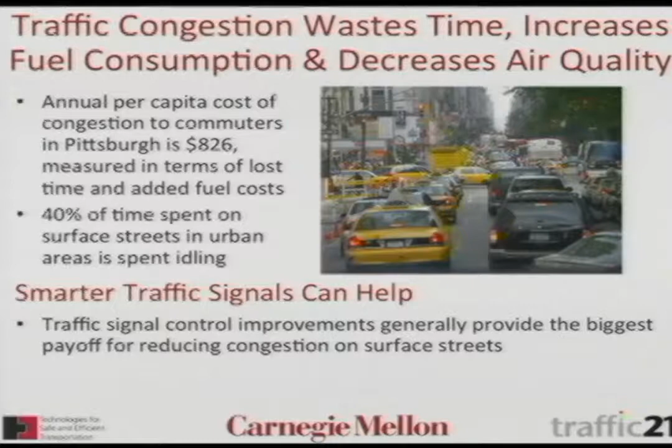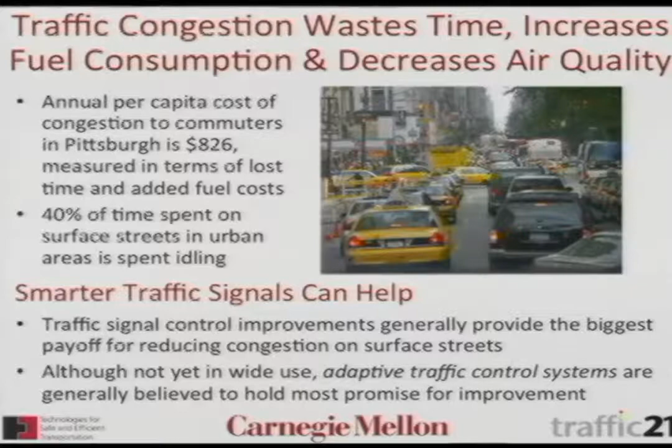The third way I could think about reducing traffic congestion is to increase or improve traffic flows, and that's really going to be the focus of this talk. The hypothesis that drives our work is that smarter traffic signals can help. It's generally recognized that the biggest bang for the buck you can get in improving congestion on surface streets is through better traffic signal control. And while they're not in wide use yet, adaptive traffic signal control systems, which I'll be focusing on today, are generally believed to hold the most promise for improvement.

Before talking about adaptive systems, let's get a basic sense of what we're after. Traffic signals are driven by signal timing plans. Here's the basic idea of how they work: I've got an intersection—east, west, north, and south. Typically, traffic signal plans are built by first looking at the different movements that can move through the intersection and grouping movements into phases. Phases would be movements that are mutually compatible, that can move at the same time. So you can see I've labeled some of the moves there—2-6, for example, is an east-west flow that can operate simultaneously, and that's encapsulated as a movement phase.

A signal timing plan is then just a sequence of movement phases. So determining a signal timing plan is really to establish a duration for each phase and what sequence—typically in conventional systems, the sequence repeats. In the example on the slide, we move through 4 phases, and then that cycle repeats. That's a classic example. So the signal timing plan problem is really to decide how much green time to give to each phase and in what order.

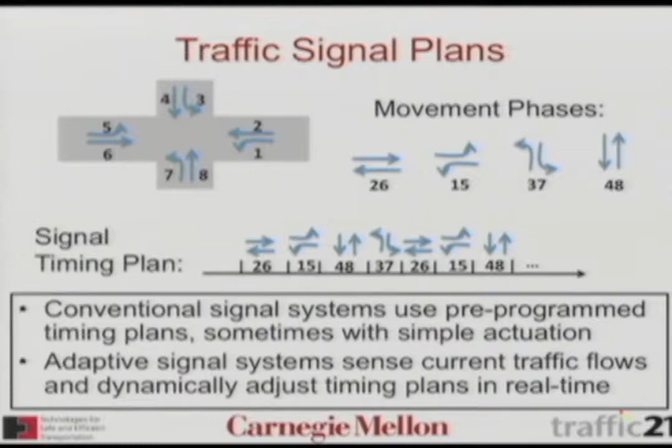Adaptive signal systems, on the other hand, really sense current traffic flows in real time and dynamically adjust the timing plans continuously. So based on the traffic patterns it sees in front of it, adjustments are made. That's the class of system we're focused on—that's what our work has been focused on, and that's what we're talking about.

Let's take a look at adaptive signal control systems that are out there in the world today. Adaptive signal control has been the subject of design for many years, and there are several systems that have been created and are out there.

The most success has been gained by centralized systems that take whatever detection is happening at the intersection, whatever view of oncoming traffic is coming, pull that back to a central location, do some amount of computation, and then push out changes to the timing plans that are driving the actual intersections.

As you think about that process, it can often be very successful, but it's often limiting with respect to reaction in real time. Typically these centralized systems operate on a time scale of adjusting the lights, integrating results from traffic patterns, maybe combining that with historical information about the flows, and then making adjustments on the order of minutes—every 5 minutes, every 10 minutes, etc.

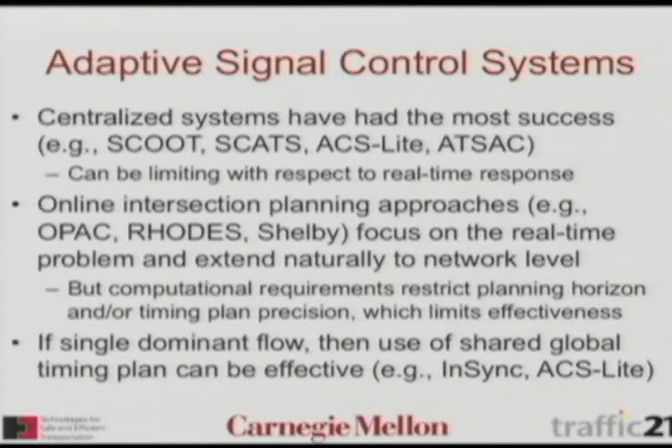One other class of systems: if I can make certain assumptions about what kind of flows are going to be in my traffic network, and in particular if I can assume there's a single dominant flow—say I'm in an arterial situation, there's a main road, and all I really need to do is manage traffic on the side streets—then I can take advantage of that structure of the problem and sometimes do very well by using a shared global plan to control the main artery and then operate locally to manage the side streets.

In fact, there are a couple of existing systems that take advantage of this kind of idea and can do very well in arterial settings. You see most of the success with current adaptive signal systems in arterial kind of settings.

One distinguishing aspect of our focus is that we're really aimed at urban road networks, networks that have more of a grid pattern, where there's more than one—there are multiple, typically competing dominant flows, and those flows change over time. So it's not possible to identify one single flow, and you need the system to discover that.

This is a slide I've been using for quite a while now. About 3 or 4 years ago, we started looking at this problem of real-time control of urban road networks, sort of the missing link in current technology. The goal of our work has really been real-time optimization of traffic flows for urban or grid road networks, characterized by the fact that you have multiple competing flows. You have to continually identify the major flows and go from there.

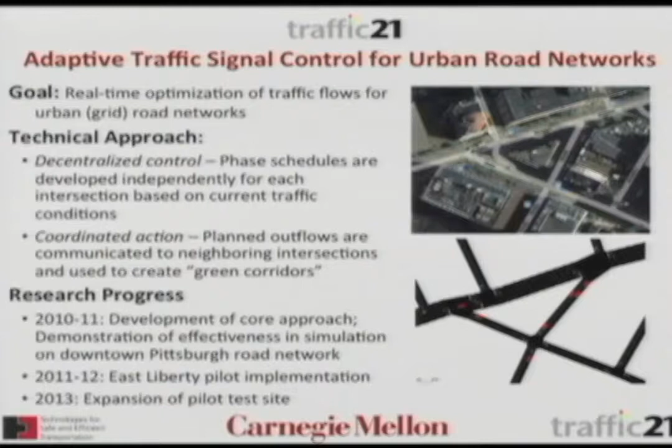That led us to look for an opportunity to try it out in practice. In the last year and a half, 2011 and 2012, we've been developing a pilot implementation of the approach and deploying it in East Liberty. It's been running there since last June, and our current focus is expanding the pilot test site in various ways.

Let me give you a sense of the technical detail, the principles underlying the approach, and then we'll move on to the deployment. The name of the system we've built is SURTRAC, Scalable Urban Traffic Control. We'll see what that means as we go along.

So here's the basic concept of operation. There's detection at each intersection. In our case we've been using cameras, but the system is watching ongoing traffic flows.

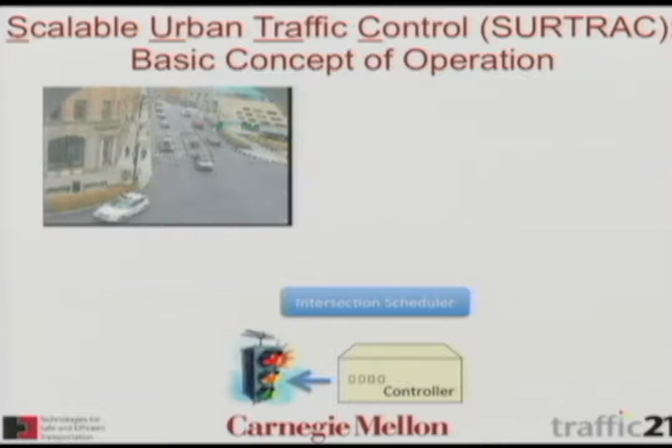Those flows are extracted, so we extract the current traffic patterns from the sensor data streams. We're using cameras, but you could use other kinds of detectors. Then our intersection scheduler computes a phase schedule, a timing plan that optimizes the flow. It essentially moves the traffic it sees in front of it through the intersection in a way that minimizes the cumulative delay. That's the objective we're currently using.

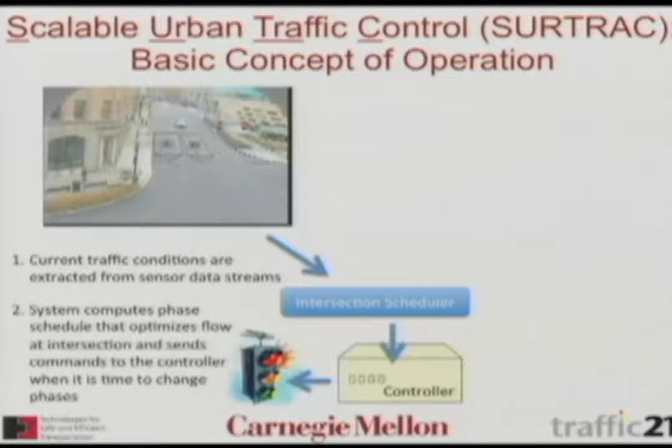Then, after it builds a schedule, it sends commands to the actual hardware controller driving the signal, telling it whether to stay in the same phase or move on to another phase.

It also communicates the outputs, the outflows it expects from its plan, to its neighboring intersections, which are doing the same thing, operating asynchronously. As they build a schedule, they now have information not only about what that intersection is seeing right in front of it with its detectors, but also about what's coming down the pike, giving it a longer horizon to plan against.

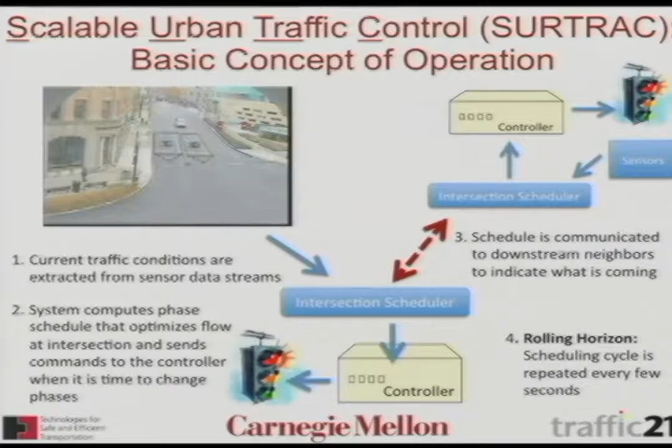That whole process repeats every couple of seconds. So it's a very real-time system, with the opportunity to adjust the timing plan on a second-by-second basis.

There are a couple of key technical ideas underlying this approach. One is our approach to intersection control, which we've formulated as a novel single machine scheduling problem, using an aggregate representation. I'll explain: we represent traffic flows essentially as sequences of queues and platoons, and those identify our input jobs from a machine scheduling point of view.

We then use the schedule to decide whether to extend or switch phases. That's one key idea. With respect to coordination between intersections, we communicate schedules to downstream neighbors to give them visibility of future input jobs.

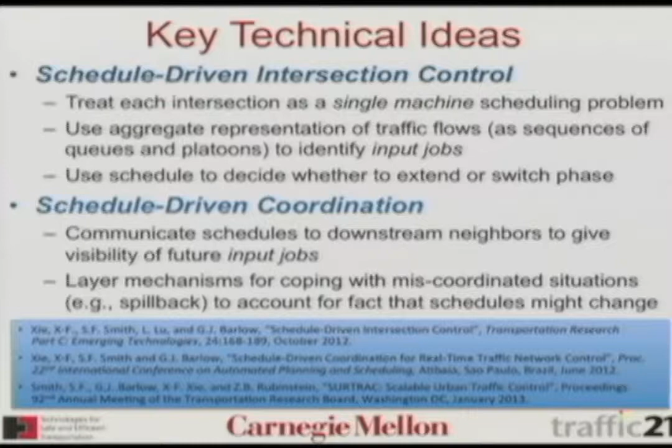This idea, if you think about it, is very simple, but it works perfectly, coordinating well if intersections execute their plans exactly as planned. Of course, that doesn't always happen, so we get situations where the plans get out of whack. Our approach is to layer on top of this basic communication protocol some mechanisms for coping with specific kinds of miscoordinated situations, to account for the fact that schedules might change. I'll say more about that in a few minutes.

First, let's look at the model of how we represent the problem, which is what allows us to get the computational efficiency. If you think of a flow, this is the kind of information I assume I'm getting from the detectors. My intersection is on the left corner here, and I've got a stream of vehicles approaching the intersection. Some are already in queue, waiting, since right now I'm at a red light.

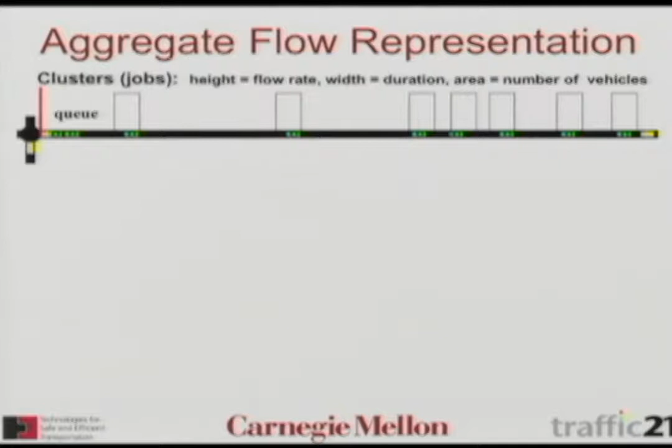So what we do is take that base level optimization and do a simple clustering. On one hand, we do what we call threshold-based clustering, which essentially puts together vehicles that are in close proximity to one another into larger entities, which we'll sometimes refer to as platoons.

So you can see there, given the proximity, we've got two vehicles that were floating that didn't get combined with anyone, so they just become their own cluster. A second form of clustering is what's referred to as an anticipated queue.

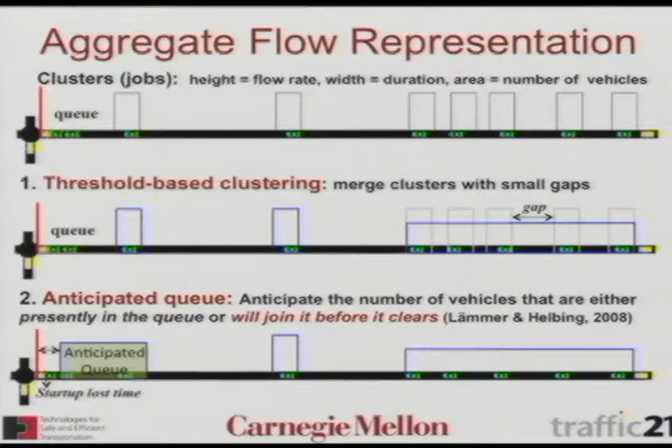Here we're just clustering the vehicles waiting at the intersection, and also those expected to join the queue before it can clear. When the light turns green, there'll be some startup lost time as cars get moving, and the vehicle approaching behind will be in the queue before it even gets close. The simple idea is to use these larger clusters as the units we'll build the timing plan around.

So with that in mind, the scheduling problem really looks like one of just sequencing clusters that operate on competing phases.

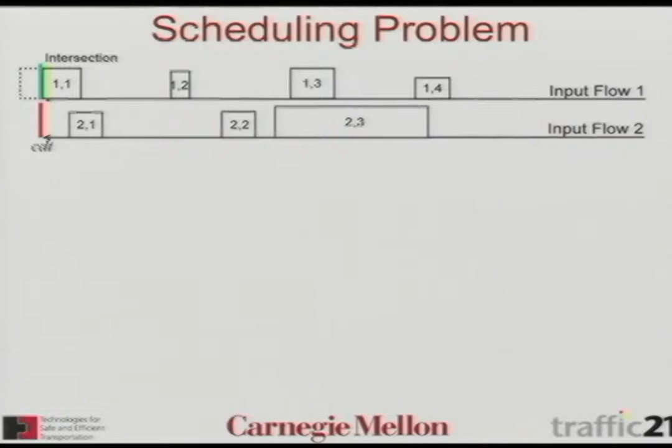Think of an intersection where you've got two one-way streets coming together—it's the simplest kind of approach you can get. I've got clusters coming toward the intersection in both directions; one light is green and one is red. The scheduling problem is just to build a sequence that gets all those clusters through the intersection.

So a schedule is a sequence of clusters. We assume, at least for now, non-preemption, so the jobs are indivisible—you've got to switch on a boundary.

Here's an example of a schedule. You can see that in putting them into a single sequence, it was necessary to delay movement on some—everything's not moving perfectly there. That's due to constraints, such as it taking a certain amount of time to shift from one phase to another. There's a yellow, and in Pittsburgh there's an all-red phase, which we've just collectively called yellow here.

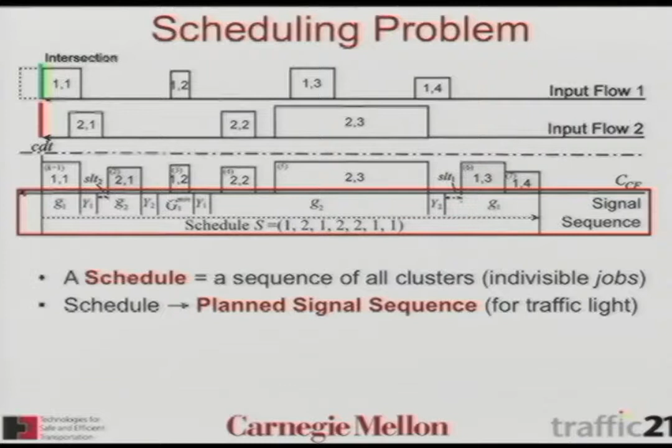Once I have a schedule, that implies I have a signal sequence that I can turn into a timing plan. There's still flexibility for deciding the plan, because there are many places along those switchover points where I could actually terminate the phase, but I've got that phase.

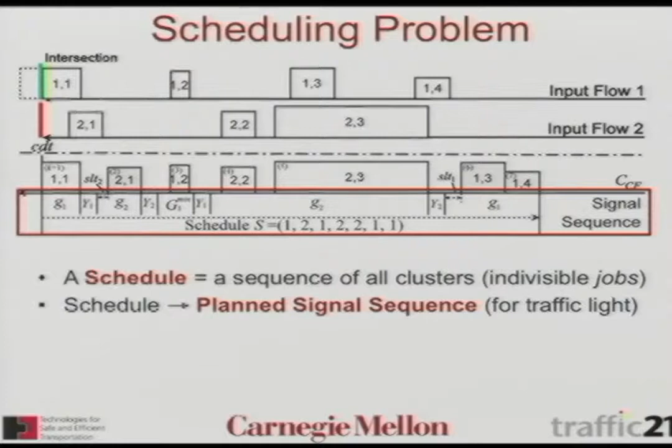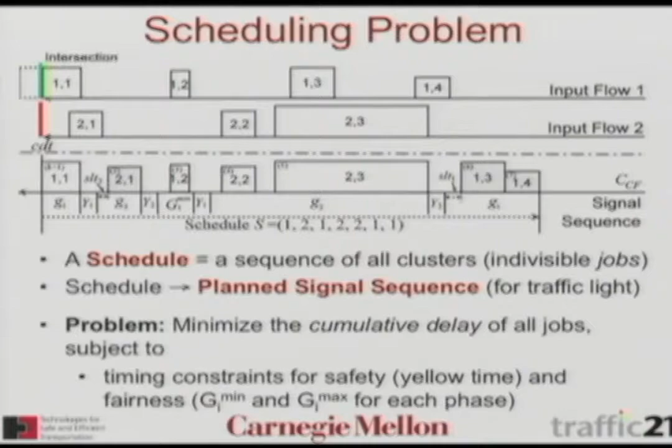The problem we solve for the intersection is to minimize the cumulative delay of all those jobs, subject to timing constraints for safety, which correspond to the yellow and all-red time, and fairness constraints, which amount to minimum and maximum times on each phase—so you give everybody a certain amount of time to shoot through, and there's a maximum.

So we solved this problem doing a forward dynamic programming search, where we simply add a new job at each decision phase. We can take advantage of pretty powerful pruning conditions to eliminate dominated solutions at each stage, since we have a regular objective function. So if I get to a certain depth in the tree and I'm at the same current phase, with the same clusters on the timeline just in a different order, I can always take the one that minimizes delay with confidence that it'll dominate.

It does dominate. We do one thing in cases where we are greedy, in that we will only preserve the state with minimum delay at each extension—that just gives us speed.

What we've done—I didn't show you the classical formulation of the problem—is turned a problem whose complexity is typically exponential in terms of a planning horizon, which limits how far you can look ahead or limits the precision of that lookahead, into a problem whose complexity depends on the number of phases and the number of clusters, much smaller numbers. If you think about the horizon we're likely to be solving for, it's a very manageable computation.

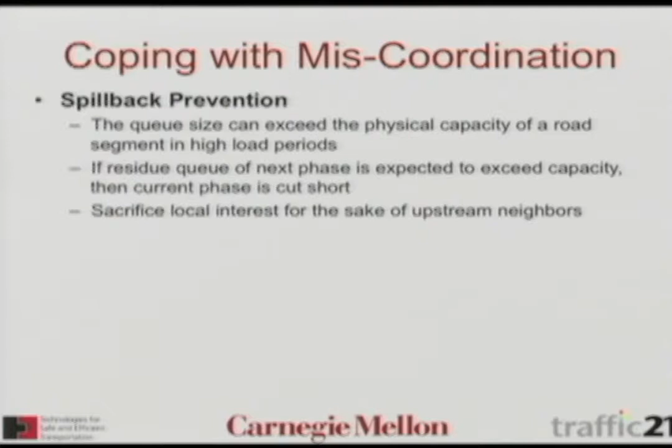Another coordination protocol we've introduced recently is what I've called network-driven actuated control. Here's the issue: the larger I can make the maximum times for a phase, the greater flexibility I give to the adaptive system, and that gives me the opportunity to do more optimization of overall traffic flows. However, the longer I make those maximum times, the more likely it is that any traffic on minor cross streets is going to suffer. So that's the trade-off, or the dilemma, we'd like to pay attention to.

Rather than just take the optimized solution the system gives, if we can find some opportunity through coordination to do better, we will. The basic idea is that intersections communicate another piece of information to their neighbors - basically phase change information. Whenever an intersection changes phase, it communicates to its neighbors that it has changed and when it expects to move on to another phase. With that information, you can do such things.

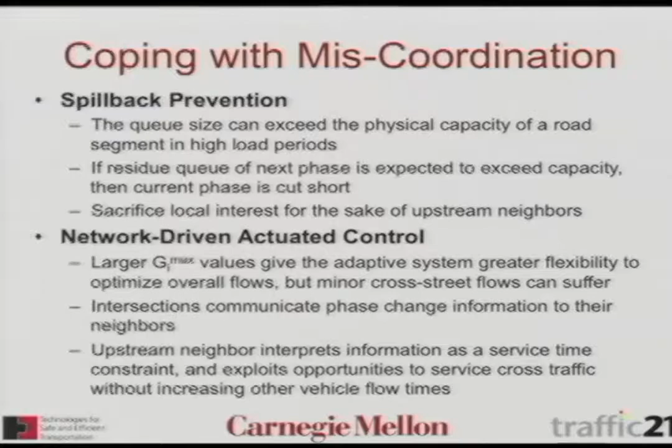Upstream neighbors can interpret that information as some kind of service time constraint. So as long as it can do it - let's say the downstream intersection is in a cross flow, and the upstream intersection is green. If I've got side street traffic, and I'm green because I hardly ever see side street traffic, but if somebody is waiting - a vehicle or a pedestrian - and I can service that cross street and get back into the flow before the downstream intersection switches phases, then I haven't delayed any vehicles, but I've serviced that cross street. This is a newer optimization we've just put into the system.

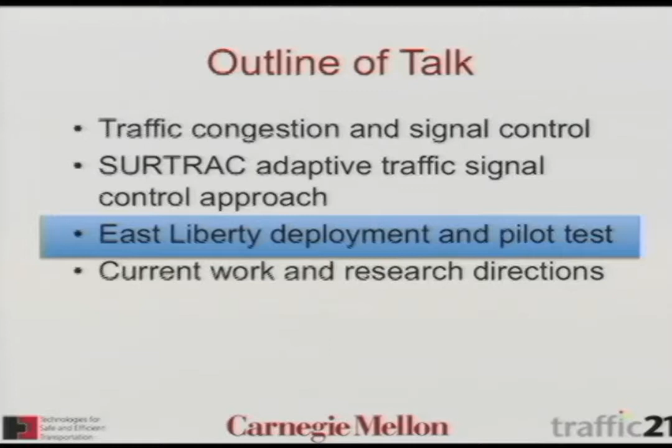So, as I said, we originally got good results in simulation, so we started looking for an opportunity and talking with the city of Pittsburgh about where we might try this out and see how it works in practice. We settled on a nine-intersection grid in East Liberty, just a couple miles from here.

I'm going to try to get out of this for a minute and see if I can show you - see if I can find this. Essentially, I'm borrowing a video that they allowed me to use, made as part of a concept proposal for a project to relocate the East Liberty busway. This is just a portion of it.

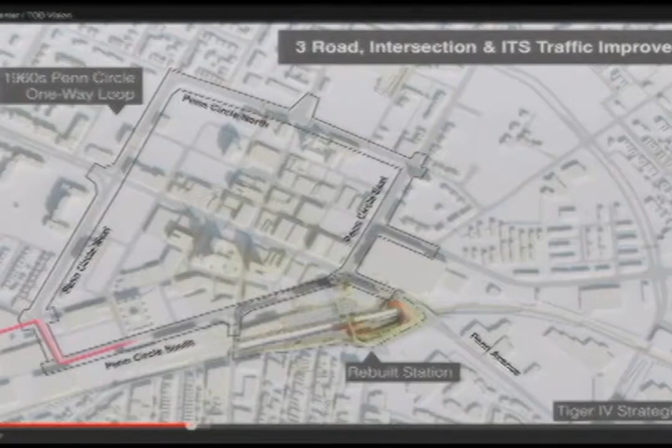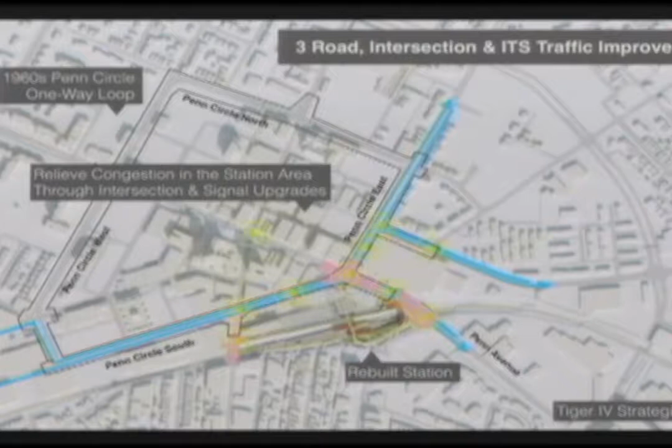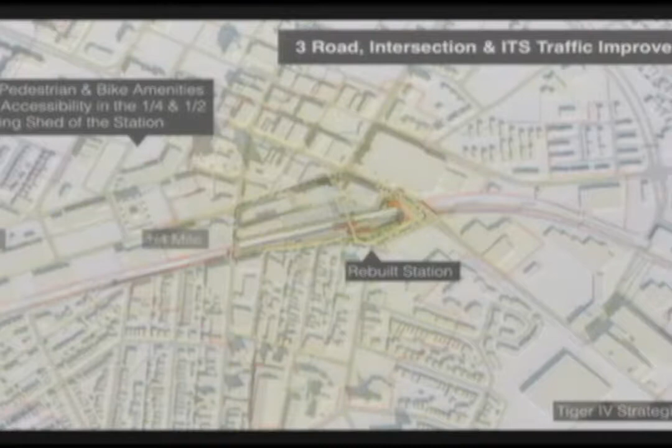That kind of shows the area of interest, and I guess one thing to note about this is that East Liberty is an area that's been undergoing a lot of change in the last few years. One aspect has been that they've changed from a one-way grid to partially a two-way traffic scheme, a lot of that coming along with the development of a new Target store.

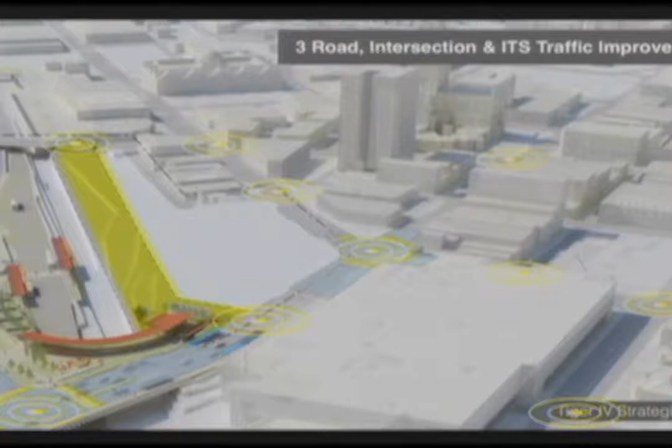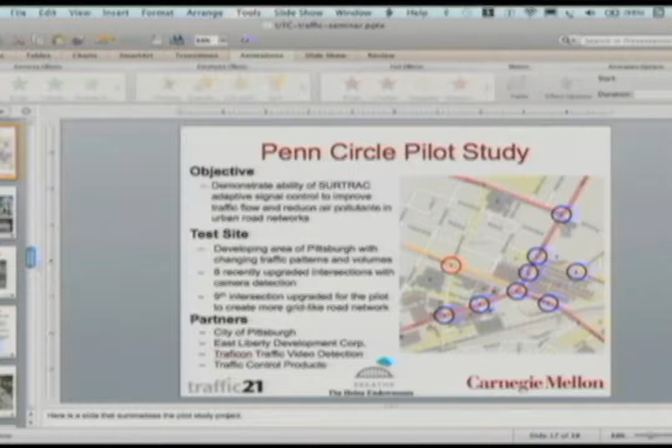And I guess the point is that we're actually involved in this Tiger grant, which has been funded and will allow us to do some expansion of our network. East Liberty as a region is really undergoing a lot of economic development, and from their perspective, us coming into this area has really been a benefit to them, as a selling point and a spurring of economic development.

Basically, the pilot test site consists of 9 intersections. The 8 intersections in blue surround the Target department store, and as part of the Target development, which happened about a year and a half to 2 years ago, those 8 intersections were all rebuilt and equipped with camera video detection. So they gave us a relatively low-cost way of testing out the system.

In conversation with the city of Pittsburgh, the city traffic engineer suggested that maybe we add this 9th intersection at Penn and Highland, which we were able to do thanks to the Heinz Endowments. And that gives us more of a grid pattern.

If I look at this area, there are really 3 dominant flows. There's the flow on Penn Circle, which is kind of that reverse L shape. There's also a flow on Penn Avenue moving east-west from the red circle that way. And then there's a third flow coming north on Highland from Shadyside. That flow is temporarily blocked at the moment because the bridge is out, but at the time of the study there were these 3 flows. So a nice example of an urban grid setting, a nice place to try it out.

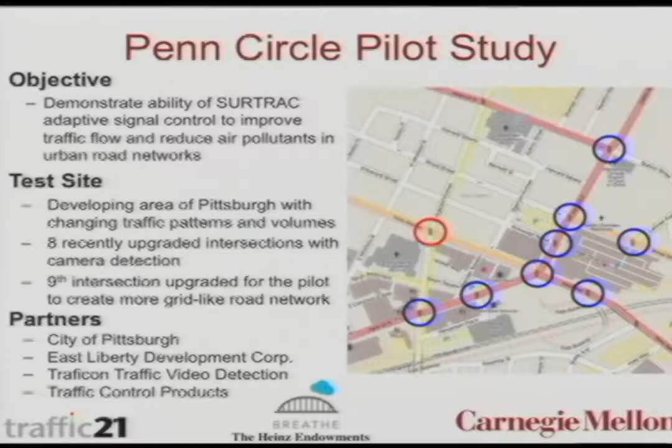One other characteristic about this that makes it especially tough: the intersections are in some places very close together, maybe 150 feet at the smallest one. If you compare that to the kind of work typically done in adaptive signal control in the literature, they're usually looking at intersections that are frequently a kilometer from each other, or on that scale. So these are very tightly spaced intersections.

And then the one intersection that we added, we added radios to allow us to communicate between that light and the rest. We definitely need communication, that's a prerequisite for it. And then there are traffic cameras at all the intersections that provide our sensing. So essentially the cameras, or the video, the processing boards, and the interface to our machine, we get results in real time from the detectors, and then we issue calls, commands to the hardware controller to drive the actual intersection.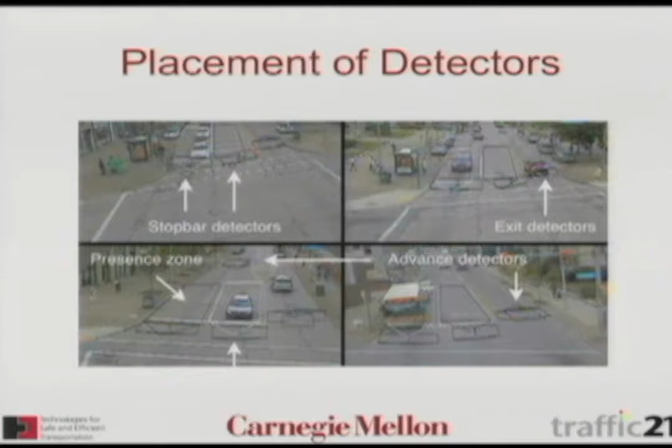Here's a diagram of kind of what you see when you look through a video camera, and a typical placement of the detectors. We're using video cameras, and you have the opportunity to draw various kinds of zones that allow you to do certain kinds of detection. Presence zones just detect the presence of a vehicle sitting at the intersection or moving over that space down at the bottom. We can also define, looking further back, advance zones which allow us to do some counting of vehicles as they arrive. Also, in the East Liberty case, there's a lot of one-way exit lanes, or one lane traffic flows, so for any internal node in the network, we can define exit counters to count how many cars are leaving the intersection. For interior nodes, that's sort of an advanced detector for the next intersection down.

The system operates in a sort of non-disruptive way. When we first started, we were kind of very cautious about screwing up the traffic flows in the area, and so the system is built in a way that we simply override the pre-existing plans that are built into the system, the pre-existing control strategy. If anything ever goes wrong, the system just reverts back to what was there before. That hasn't actually happened yet, but there's some concern.

We also tolerate some amount of loss of communication with our neighbors. We're a totally decentralized system, so if we have any kind of network problem, we'll detect that after some period of time, and then automatically shift to using sort of moving average historical data until we come back online again.

That gives us a very robust infrastructure, in the sense that while we may lose information in one direction, we're typically in a grid, so we're getting information from all directions, and we can still operate with whatever real data we have.

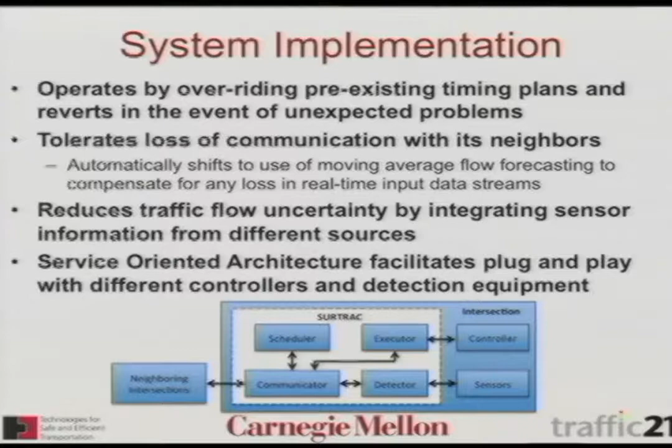We've also done some work trying to reduce uncertainty by integrating information from different sensor sources. In retrospect it's not surprising, but going out there we've really realized that sensors are not necessarily reliable. You'll have big trucks going down both lanes, sharp turns missing our detector zones, and so there's a lot of uncertainty in the reading.

We're waiting for the day of connected vehicles so that we can have much more precise information about who's coming toward the intersection.

Here's a quick video we took one day last August, a before and after at the main intersection at Penn and Penn Circle. We're looking at traffic going west, coming towards us. One afternoon we turned our system off for a while and ran the old one, then turned it back on and ran the new one.

This video is sped up, I think either 4 or 8 times, to give you a sense of the flows rather than the typical vehicle. If you watch it, you can kind of see the smoother flow on the right. Hopefully you can see that.

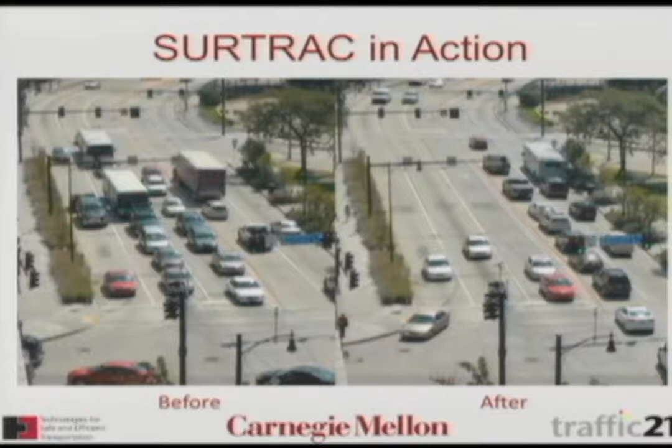We did conduct a formal evaluation, so let me say a little bit about what our pilot evaluation looked like and how we did it. We first identified the 12 highest volume routes through this grid network, indicated by the blue links on the left.

Each direction is considered a different route. For each of those routes, we did multiple drive-throughs with an app, essentially using a GPS app to track our paths, letting us detect how fast we're going, the trajectories, how many times we stopped, et cetera. We conducted multiple runs for each route during each of 4 periods of the day.

AM rush, PM rush, midday, and evening. We did that both for the pre-existing way the signals were controlled prior to our introduction, and running with the SURTRAC system. Then we compared transportation efficiency and emission reduction results.

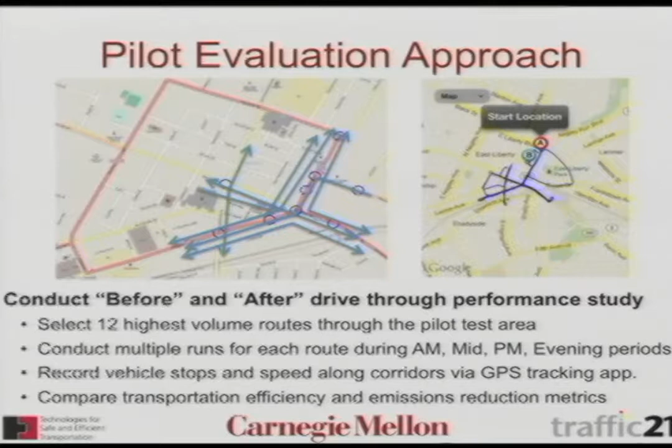The pilot test was funded by the Heinz Endowments as part of their BREATHE project, which is really concerned with air quality. Their real interest in seeing this technology tested out was in seeing what kind of impact it could have on reducing emissions, so that's one of the areas we were studying.

Here's a few more details about the study. For the AM/PM rush, what we were comparing to was a coordinated fixed timing plan that was generated originally using an offline optimization tool called Synchro, a state-of-the-practice tool used by traffic engineers to try to optimize coordination in advance based on expected flow patterns. Those offline optimized plans were used during the rush periods.

In the other periods, the system just ran in actuated free mode, essentially keeping green on the main drag, whatever was defined to be the main drag, and then whenever traffic was detected at a cross flow, giving time to that and moving back to the main flow. These plans were put in place maybe about a year prior to when we ran the experiment.

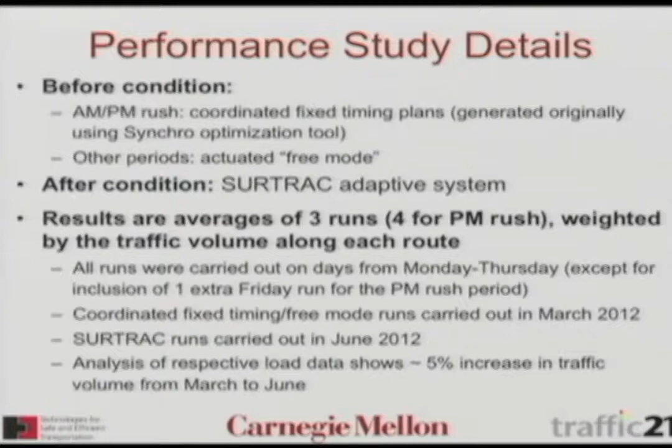Because that was really the heaviest traffic time during the period we were testing, we conducted the runs with the pre-existing system in March of 2012. We intended to do the adaptive runs immediately after, but ran into difficulties. It took a couple months to work out a legal agreement to take over the lights with the city, so we were stalled. Once that happened, we ran our adaptive runs in June. We did a load analysis of those two periods and found they were essentially the same, with a 5% increase in traffic volume from March to June, so the adaptive SURTRAC had a slightly heavier load to deal with.

We got great results. Here's a summary. We have a report describing the results in detail that's available for anyone. What I've shown here is the aggregated results, both by period of day and overall, using traffic volume data to combine routes as we aggregate. Overall we got over a 25% reduction in average travel time through the network, a 34% increase in speed, a 31% decrease in number of stops, and a 40% reduction in wait time. Using a standard fuel consumption model, we projected a 21.5% reduction in emissions. So, super results.

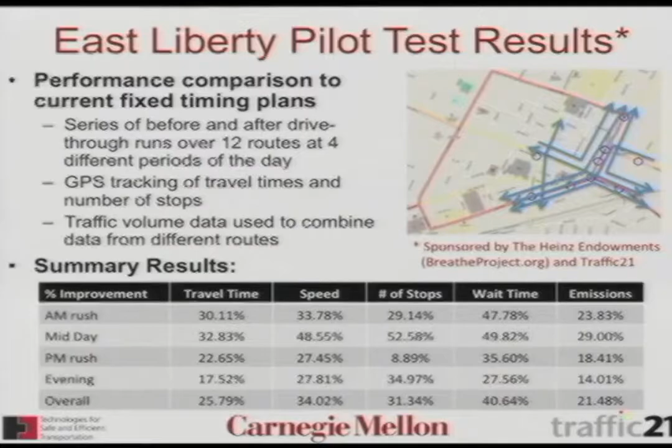We were pleased. The system's been running now continuously since June.

We've been doing a couple different things. Our current focus: we've gotten funding to expand the pilot test site eastward toward and around Bakery Square, out toward 5th, moving that way eastward. That will incorporate 9 more intersections, essentially doubling the size of the test site.

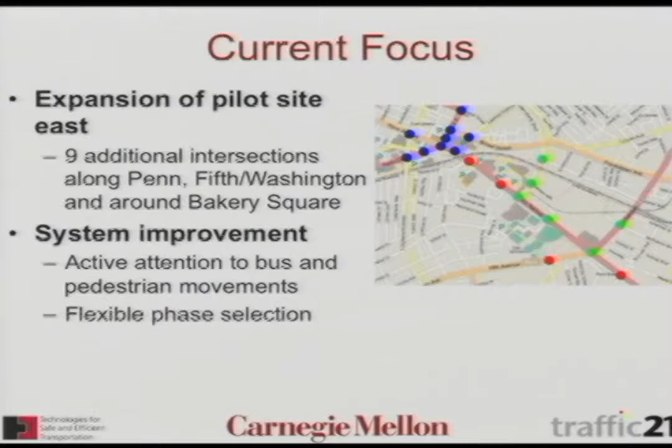One issue we're very interested in now is demonstrating scalability. We believe our system to be arbitrarily scalable, but we'd like to really demonstrate that we can get there. We're also working on generalizing and improving the system in various ways. The coordination protocol I discussed earlier is a start toward giving more active attention to pedestrians and bus movements—I'll say more about that in a minute. We're also looking at the problem of flexible phase selection, and I'll say something more about that too.

Along with this current expansion, we also have a proposal pending to expand the pilot the other direction, and we really expect this to happen over the next year and a half. The city of Pittsburgh has funding starting this summer to upgrade the controllers and communication infrastructure from East Liberty back along the Baum and Centre corridors to Craig Street in Oakland. We're proposing to piggyback on top of that, which will give us the control requirements—adding detection to these intersections, and then adaptive control.

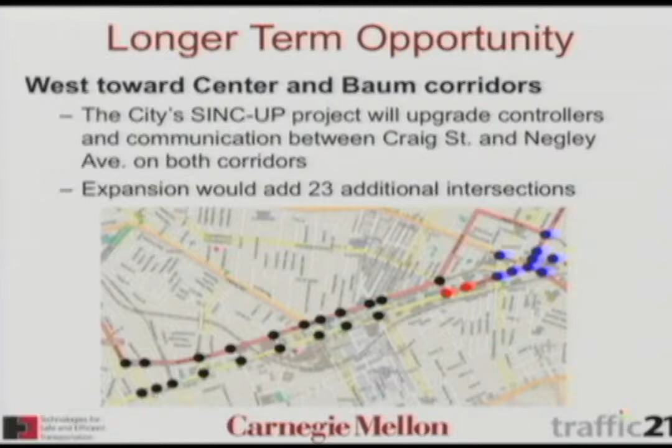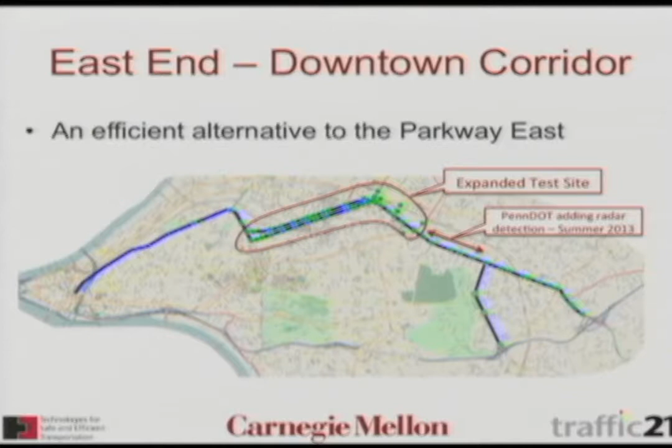If you think about the expanded test site deployment I talked about, it would cover that circled area, and you can see from Craig Street to downtown there are 3 signals. Going in the other direction toward Wilkinsburg, PennDOT has a project to install radar detection on the 6 intersections from where we'll end up at 5th down to Braddock Avenue, near the end of the city of Pittsburgh. At that point you'd have two paths, one through Regent Square and one through Wilkinsburg, putting you not far from having a virtual adaptive alternative corridor to the Parkway East.

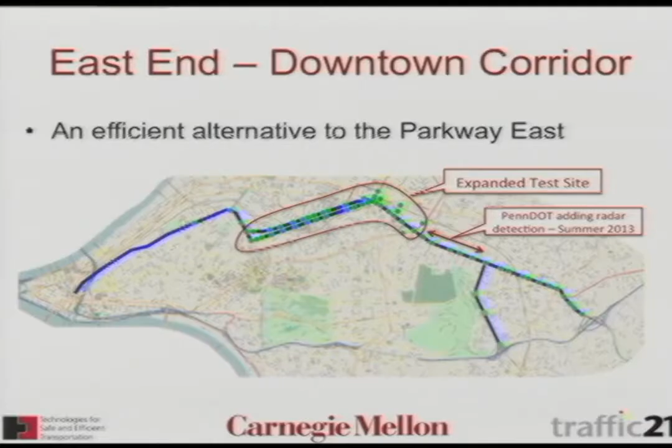So there's good momentum, and we've talked with Wilkinsburg about this. We did a study for Heinz on what it would look like if we did all the intersections in Pittsburgh. Who knows whether that'll happen, but certainly we can have a good, positive impact—an extremely positive impact—without doing too much more expansion.

Let me just say a couple words about some of the work that we're doing now, and then I'll finish.

One concept that we didn't use in the pilot test, but is used in other signal systems, mostly conventional ones, is phase skipping. The issue is that if you have changing traffic flow patterns over the day, they can make various phases more or less essential at different times. A prime example would be left turn signals that take up time and block traffic in the opposite direction—heavily utilized at certain periods of the day, and not utilized at all at others.

So you can gain great efficiency over the day if we can detect those situations and skip phases when there's no waiting traffic. That's the goal. The trade-off is that phase skipping, or more generally arbitrarily selecting phases, increases the uncertainty associated with the planned outflows I communicate to my neighbors. As I add more flexibility to skip phases, I can degrade coordination through the network, because I'm less confident about what phase is coming next and how to coordinate.

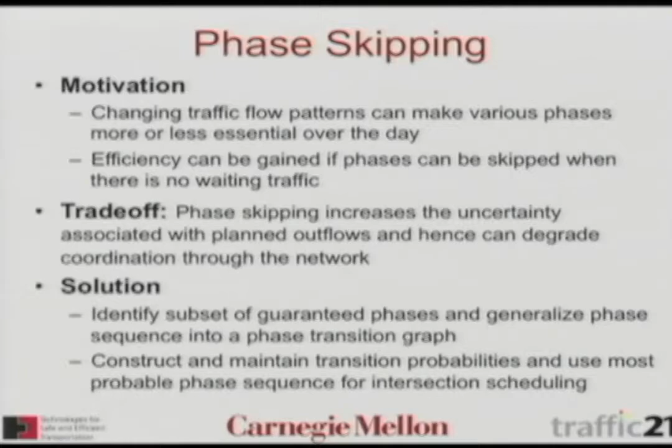The idea is to build those probabilities from historical information, so we can track on a moving basis what phases are most likely, most used, and underused, and use that information to decide what to communicate to the neighbors for planning purposes. I can decide my most probable next phase and use that when planning outflows this time, then adjust as things come to pass or not. That's one idea we'll be evaluating in the short term.

Another longer term problem one of my students, Aravindh, is working on is real-time bus detection from video. The idea that spurred it is that within robotics we've had recent success in exemplar learning using support vector machines for general object detection. This isn't a real-time computation by any means, but by exploiting the structure of this setting—the fact that cameras are rigid and don't move—we can localize where we're looking and what we expect to see in the frame.

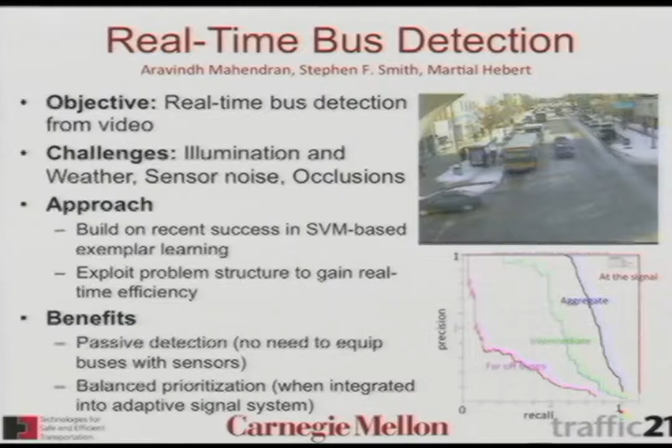The reason we want to detect buses is so we can do some kind of balanced prioritization, integrating it into our adaptive signal algorithms—so that if we recognize a bus is picking up passengers while dwelling, we can service cross traffic, for example. We've gotten some decent initial results, but we still have a ways to go on that.

Finally, some other research directions. What we're optimizing right now is traffic flow metrics, minimizing cumulative delay, but one can also think about optimizing for other effects. For example, optimization for environmental impact is an area Heinz is certainly interested in, and we're interested in generally. The conventional argument—and to some extent this is true—is that if I optimize traffic efficiency, I'll get the secondary benefit of minimizing or reducing emissions.

It is possible that you would get a different trade-off if you emphasize more those metrics that correspond or relate more directly to environmental impact. So, for example, I might think about minimizing number of stops rather than optimizing speed. This is an area we've begun to think about. We believe that as long as the objective function can satisfy certain characteristics, our search procedure should translate. If it doesn't, I'm sure we can find a search procedure that can do it.

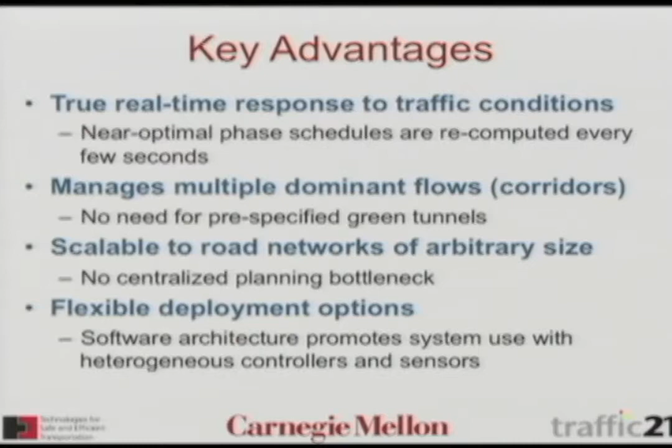We manage multiple dominant flows as opposed to just single corridors, so there's no need for any kind of global information about a designated dominant route. We believe our approach is scalable to road networks of arbitrary size. It also has the advantage that we can grow it incrementally - all you need to do is connect the new intersection to the existing network and put a computer in the box, assuming you have detection. That's quite different than a system that requires an overall central framework to build, so it gives a low-cost way of proceeding.

And we really are designed, I didn't talk much about it, but our software architecture is aimed at promoting use with whatever equipment is out there. You can think of this approach as using the auto industry as a kind of aftermarket approach. We would like to be able to use whatever hardware controllers are out there, assuming they have the minimum requirements, and whatever kind of detection is out there. We're using cameras now, but for Baum and Center we may in fact move to radars, and there are other kinds of detection as well. So I think I'll stop.